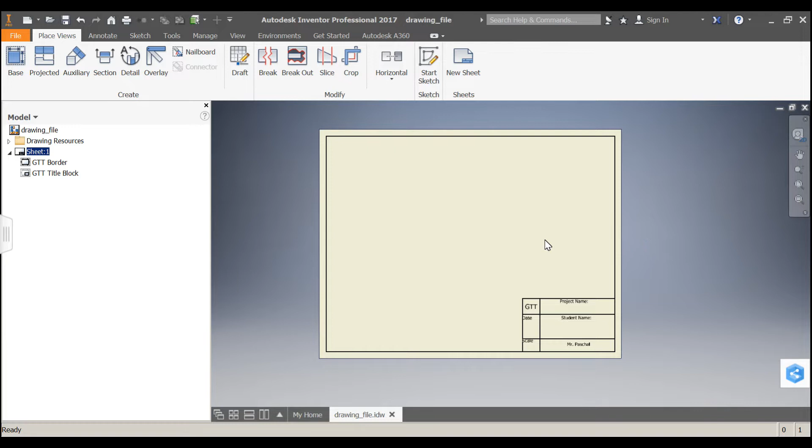The first drawing file that we're going to make is for the pegboard part file. So I'm going to start with my base view, and I don't have any of my parts open, so I need to select which document I want to place on my drawing file. I'm going to open an existing file, open my pegboard toy folder, and there is my pegboard.

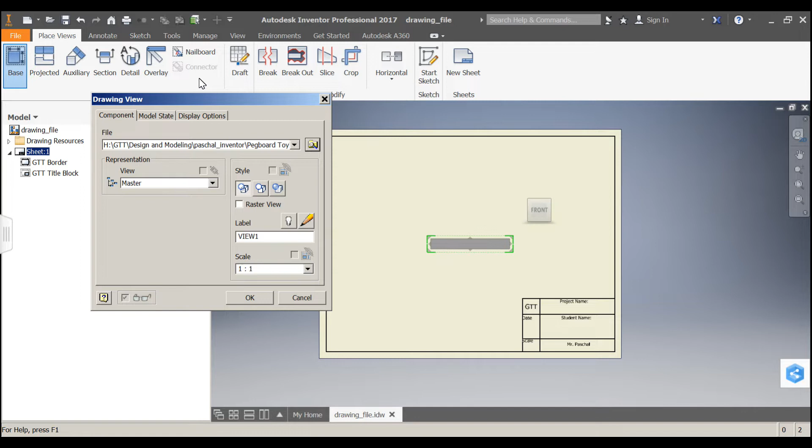If you'll notice on the drawing file example on the website, you'll see that the scale should be 1:1, which it already is by default here. So I'm just going to drag my base view to the lower left-hand portion of my page. And then I'm going to put a top view in by clicking above it, a right side view clicking here, and then an isometric view here.

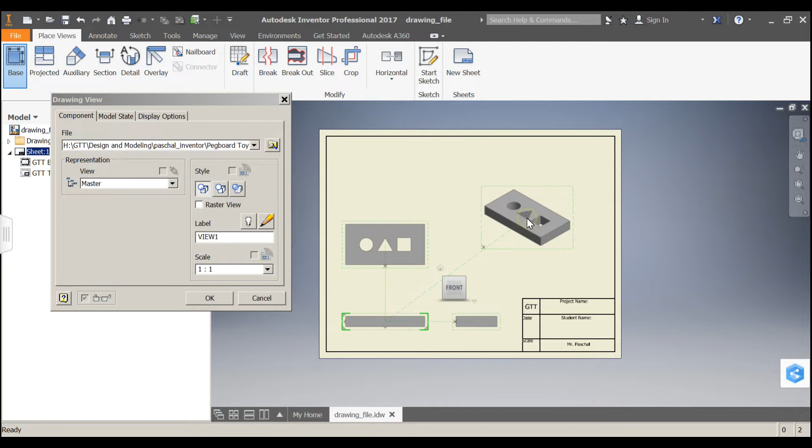And I can click OK. And I want to show my isometric view shaded, so I'm going to double click on it, and that will open this drawing view box back up, and I'm going to select shaded and click OK.

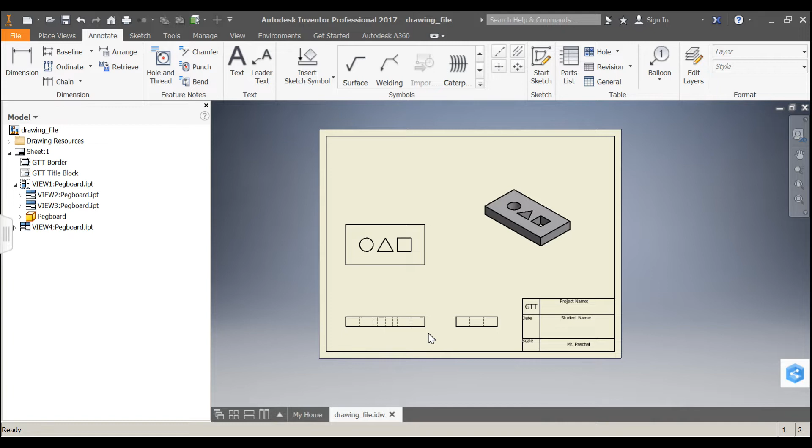Now our views are in there and we're ready to start annotating with dimensions and text. So I'm going to go to the annotate menu, and I'm going to start with the front view, and I'm just going to add a dimension for the total length. So I'm going to zoom in a little bit here, click on the left edge, and click on the right edge, and then pull that 5.75 right above and click it into place.

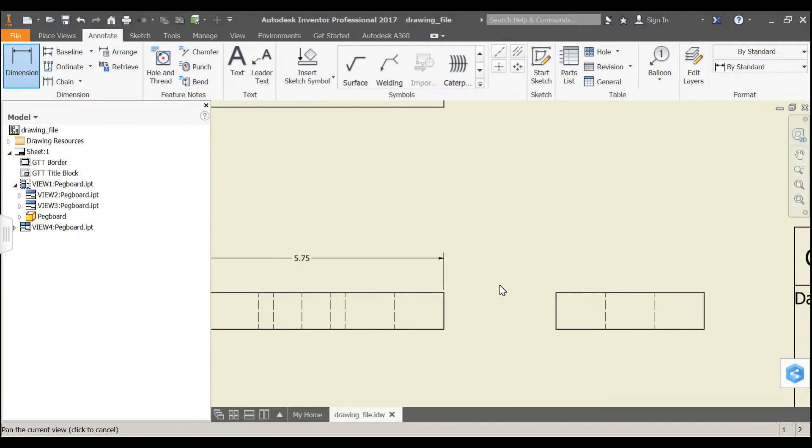I'm going to go ahead and uncheck this so it will stop popping up. Next, I'm going to pan over and work on my right side view.

I'm going to dimension the height. I'm just going to avoid that green dot, I don't want to click on that, that's the midpoint of the line. I'm going to click just above it, pull that 0.75 out, click it into place, and then I'm going to dimension the depth, again avoiding the green dot. I'm going to click off to the side here, pull it up, and put that 3.0 in place.

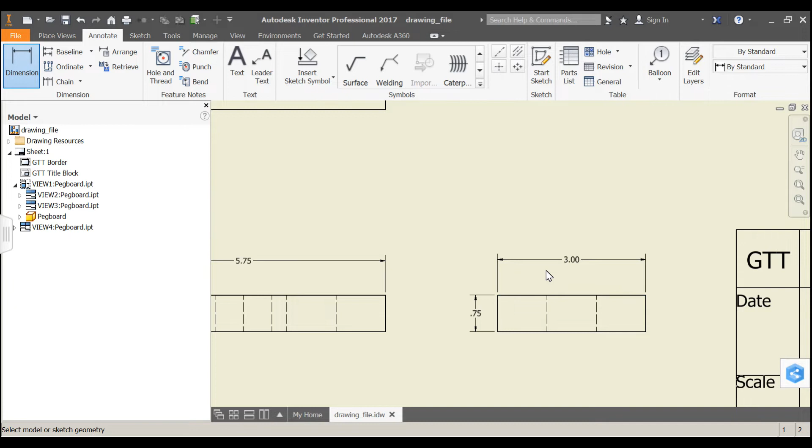Now the top view is a little bit more involved. There's some more dimensions and some text that we're going to add on here as well. But we're going to start by adding a center mark. So I'm going to choose that, and I'm just going to click on the outer portion of my round peg hole. And you'll notice it puts a center mark on there.

And now I'm going to start adding some dimensions, starting with the diameter of the round peg hole. And then from the top edge to the center of that center mark, pull that over 1.5. Then I'm going to start going from the left edge to the center mark, that one's 1.5.

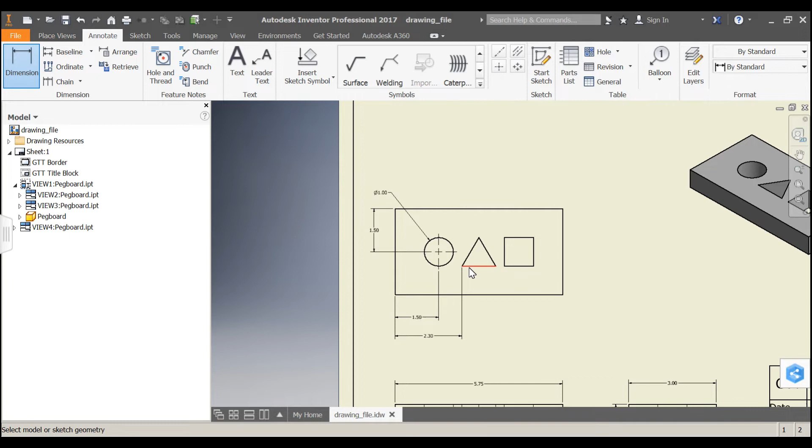Then from the left edge to this left edge of the triangle, 2.3. Then I'm going to dimension the total length, or width I should say, of my triangle hole, again avoiding the green dot. Pull that one down, 1.15.

I'm going to go back to my left edge, to the left edge of my square, 3.75. Now the width of my square, 1.0.

Now I'm going to add a dimension from the top edge to the top of my square, and then a dimension for the height of my square, like that.

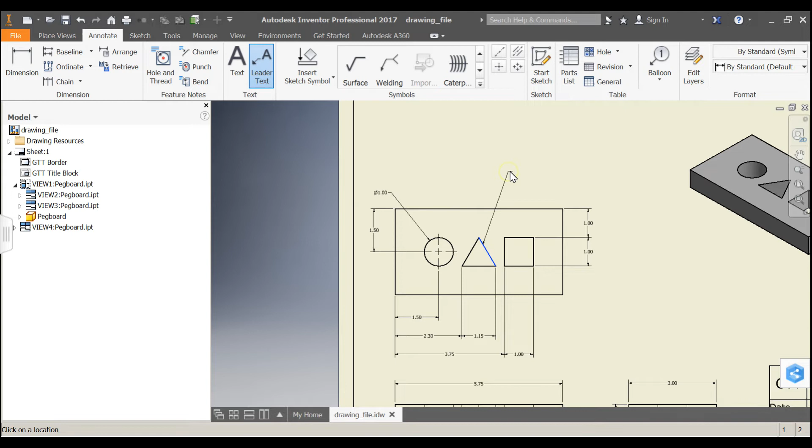And the last thing that I need to add to this particular view is what's called leader text. So I'm going to choose that, click on my triangle, click again, then right click, continue, and it's going to ask me for some text. We typically use 0.35 for our text size, but this could actually be just a little bit smaller, so I'm going to go with 0.25. But we want to identify this triangle as an equilateral triangle.

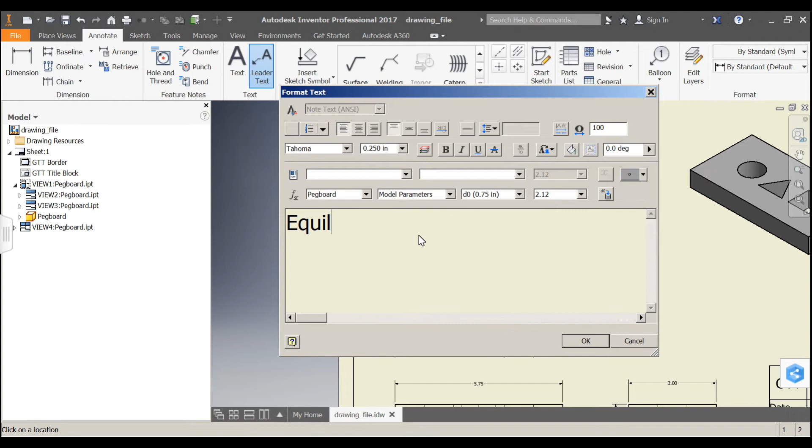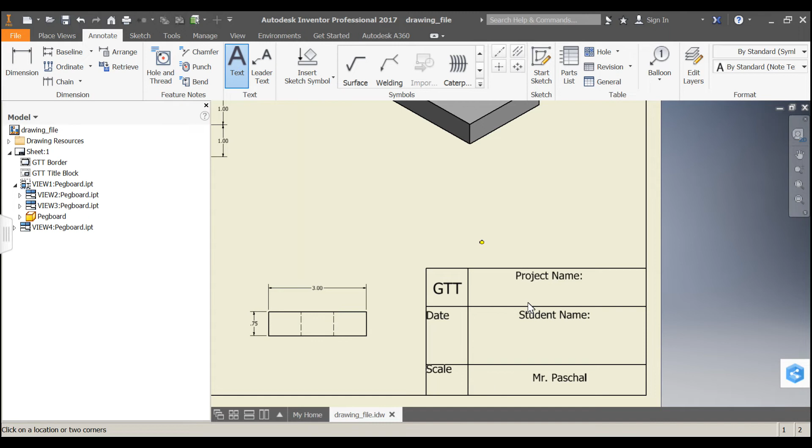And so then you'll see that text show up there. The last thing we have to do is to fill out our title block. If you're already comfortable with this, you could probably go ahead and stop the video, but I'm going to show you just in case you need to see it.

So I'm going to draw my text box for project name. Here is where the text size needs to be 0.35, and I'm simply going to call this Pegboard. And then I'm going to hit escape to get out of my text tool because I don't like where that text ended up, so I'm just going to drag it and try and center it a little bit.

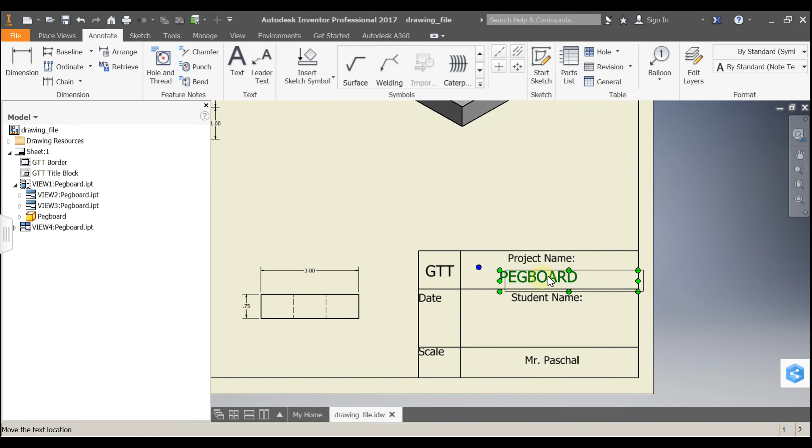And I'm going to get my text tool again and enter my date. Obviously you would change my font size, you would put in whatever today's date is, but for me it's going to be 12/6. And my scale, if you recall when we placed our views in there, our scale was 1:1, so it's 1:1.

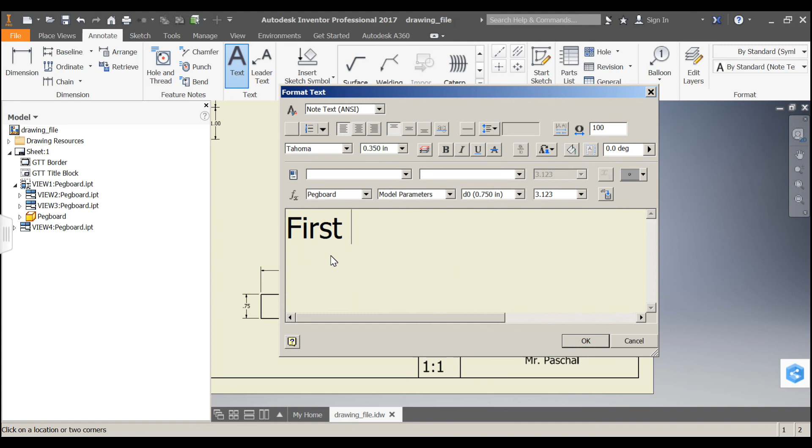And then your name. And we want to make sure we have our first, not capitalize all of that, first and your last name. And if you need to, adjust it.

So this drawing file is complete, so I'm going to save it in my Pegboard toy folder actually. And I'm going to save this as Pegboard drawing.